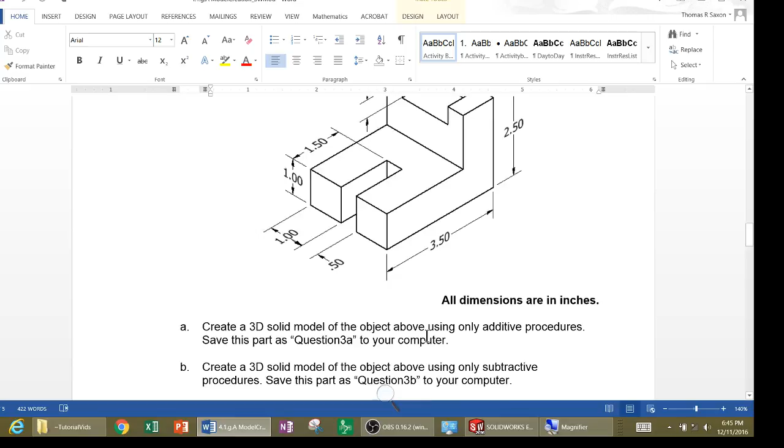So we'll look at this real quick and let's figure out the best way to do it. And I think probably the best way to do this is to make a 2-inch by, looks like 2-inch rectangle right in this body part, and then we'll go ahead and make what appears to be a 1-inch rectangle on top, and then add our tails on each end. So let's get started with that.

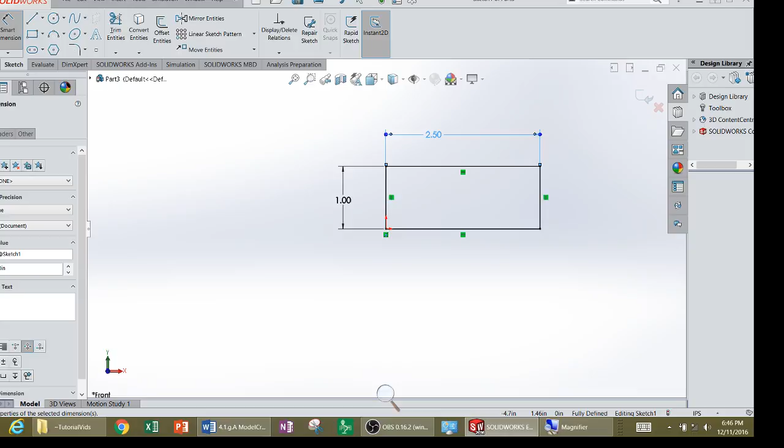So we want to extrude this out. Let's come out at us, and you can see that it's 3.5 inches total depth, and I'm going to take 1.5 inches off of that, and that gives me this rectangle right in this region. So that will be 2 inches.

And I'm going to continue on. I'm going to make 2 rectangles now. I'm going to extrude a 1 by 1 by 1.5 inches. And then I'm going to also extrude what appears to be a 1 by 1 by 1.5 inches on the other side. So let's start a new sketch on this front face. I'm going to choose a corner rectangle.

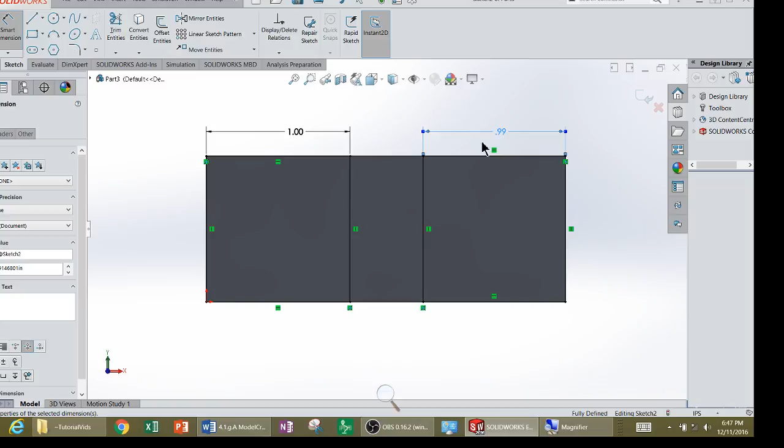And you'll notice that if I drop that down on one side, click, drag, coincident, drop, and now just give a dimension of 1 inch. That part is defined. Give this one a dimension of 1 inch. We're now defined. When I exit my sketch, you're going to notice that I can go ahead and extrude this.

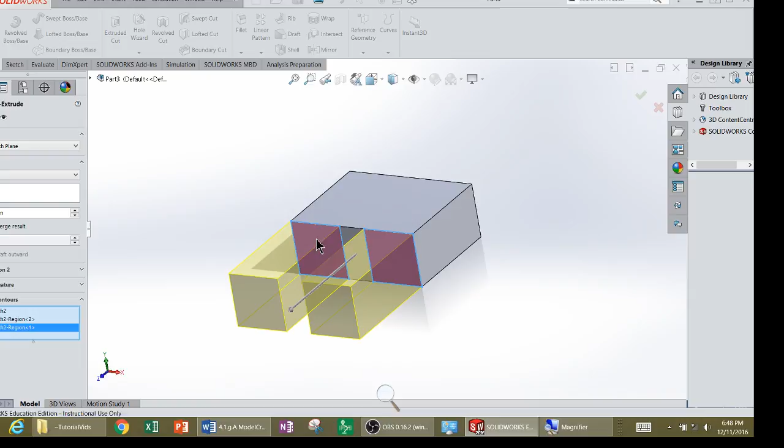Now I can choose different contours, and you see that I've got sketch 2 chosen. If I just come in here and start clicking on different contours, I can add and subtract contours. So you see how I'm clicking and things show up and go away, and you can play with that a little bit. But now I've got that extruded out, and my total depth is 3.5 inches now. So 3.5 inches, I've got my base done.

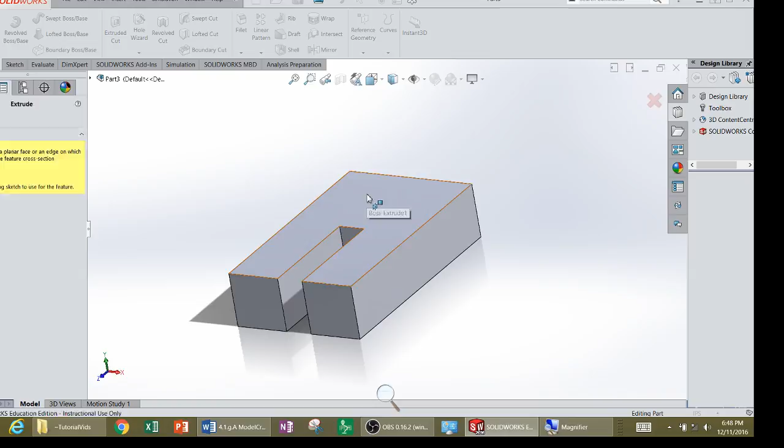So you'll now notice that what I need to do now is to come up a total of 1.5 inches, but I'm going to draw a rectangle here that's first a 1 inch rectangle, and it's 1 inch wide by 2.5 inches on top of my present drawing. So we're going to start another extrusion on top of my drawing, use a corner rectangle, start on this corner and drag to that edge. Get the coincident markers on both, and then give it a dimension of 1 inch deep.

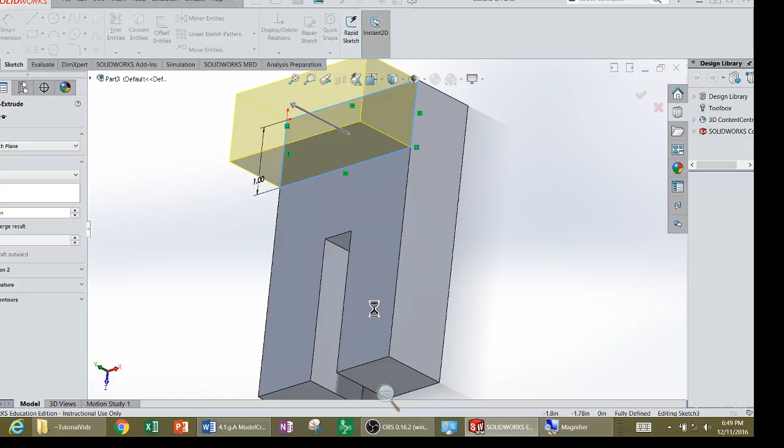With it 1 inch deep, I can exit my sketch, and you'll notice I'm going a little faster now, and I can extrude that up to 1 inch tall. Now you can see that we're very close. I've just got to add these 2 ends on, and these are 1/2 inch wide and they're 1/2 inch tall. So pretty straightforward. Let's start another extruded boss base on top of the surface.

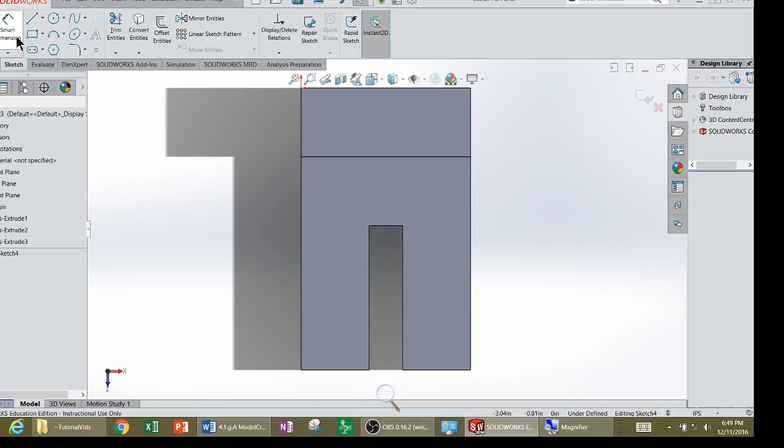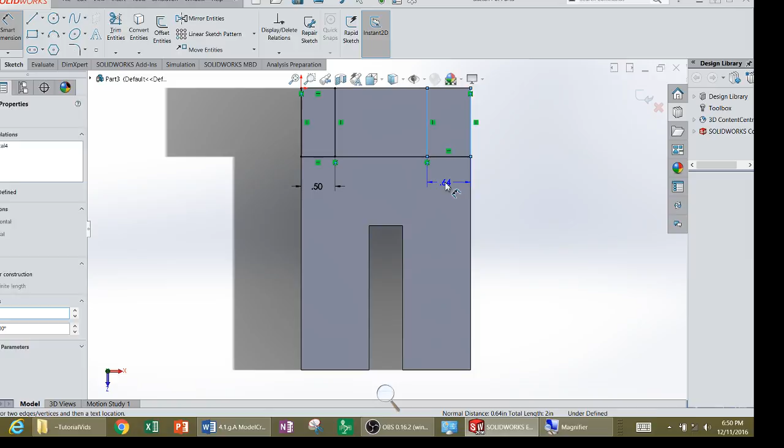It asks me to sketch my rectangles coincident with the existing rectangle and coincident with the existing rectangle. Give it a dimension of 1/2 inch and 1/2 inch. Exit my sketch, and you'll see I can roll my model. I need to go 1/2 inch up and accept it.

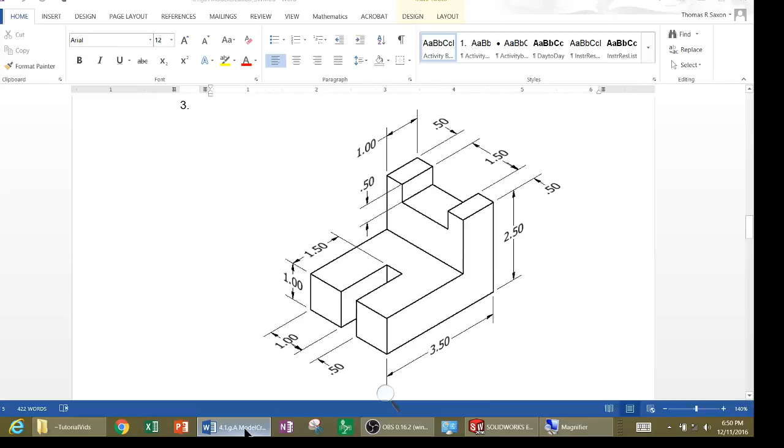I have now made my part through additive methods. So this one, I'm going to go File, Save As, and this will be question 3A. And that's it for question 3A.